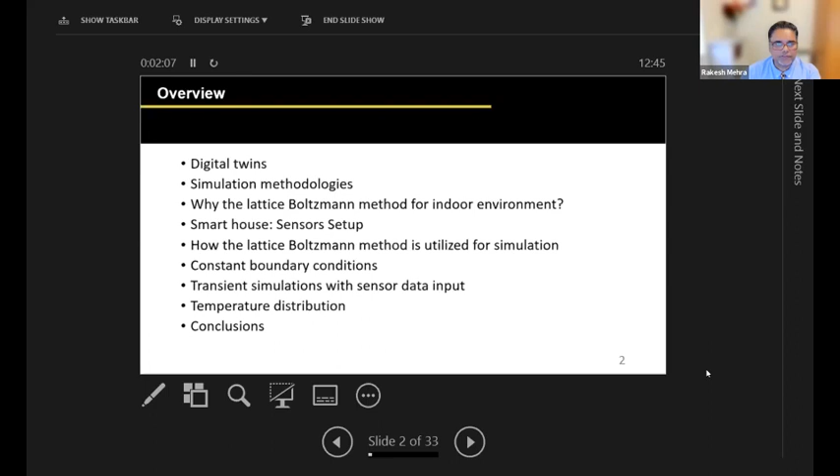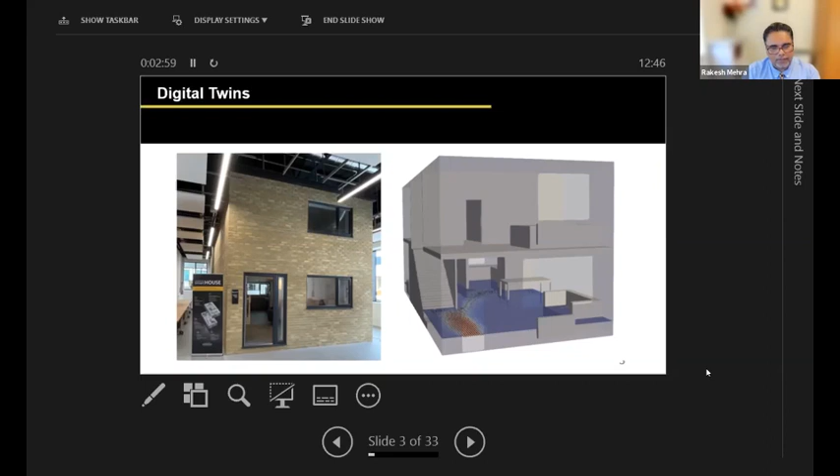But there are many technical aspects with regard to this in terms of twinning, what is the level of twinning and all that, and I'll come to that a bit later. For the moment, just for a basic description, we have a computer model and we have a physical model here.

Now, slightly more detail about how digital twins act. I showed you a physical model here and a digital model here. In this paper by Shahzad et al., they have very clearly outlined a physical asset and a digital twin of that asset. Basically, twins are twins to each other, but they are interacting with each other in real time.

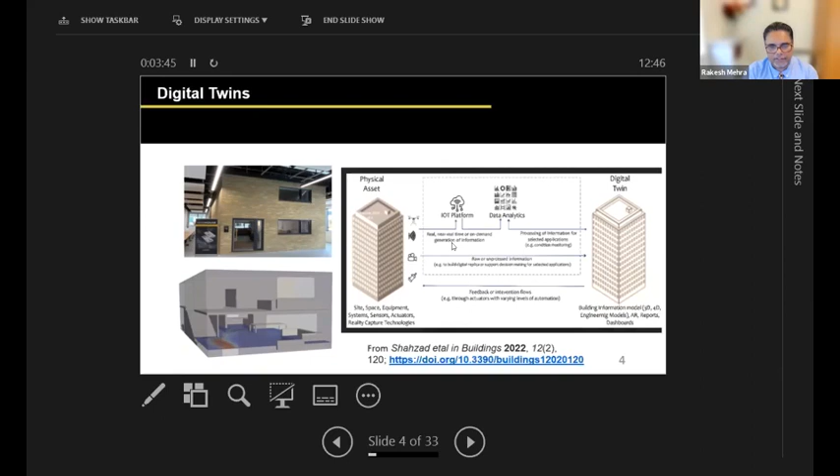For that interaction, we need an IoT platform. So we need a number of sensors put in the physical asset, and these sensors in real time must interact with the digital twin that we have on our computer screen. Both will have the capability of affecting each other's operation.

So let us come to something slightly more technical: what a digital twin is and how do we define it. There are lots of definitions, and because there are a plethora of activities currently in this particular area, digital twins mean different things to different people. If you go through the literature, there are lots of definitions.

I like this definition: it is an integrated multi-physics, multi-scale, possibly probabilistic simulation of a complex product that uses the best available models and sensors, and updates all the processes in the computer model, which indicate what is happening in the real twin.

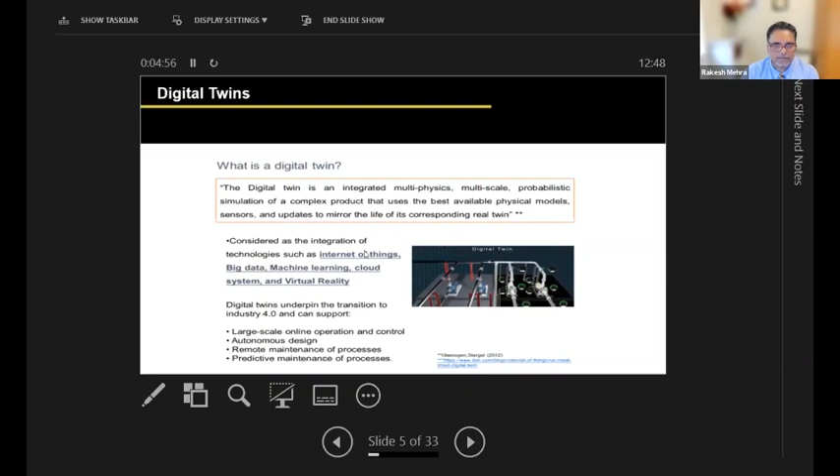So lots of things are needed, which includes many technologies: Internet of Things, big data, machine learning, cloud systems, and virtual reality. I'll go step by step through this with more detail on how these things are used and integrated, and then how they can be used for green, gray, and blue infrastructure, and how this adds to sustainability, which I will cover a bit later.

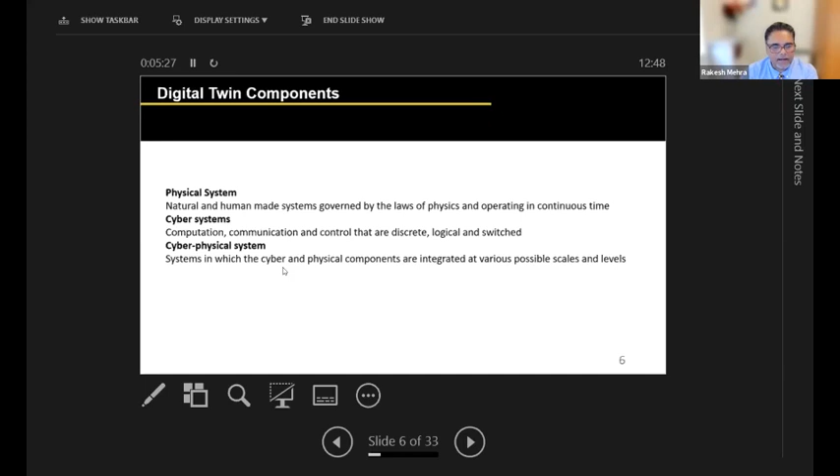So in a nutshell, a digital twin has three components. We have a physical system, as I showed earlier. We have a cyber system that works on a computer, and then we have a cyber-physical system that combines the physical system with the cyber system. The cyber-physical system is sort of a brain that acts between the physical system and the cyber system, and this is where lots of technologies come in.

So the key technologies that we need to have in the digital twin is, first, like we have been hearing, IoT for a long time. So we can connect a number of physical devices via the internet without human to machine interaction, almost in real time. So this is the first technology that is used in the creation of digital twin.

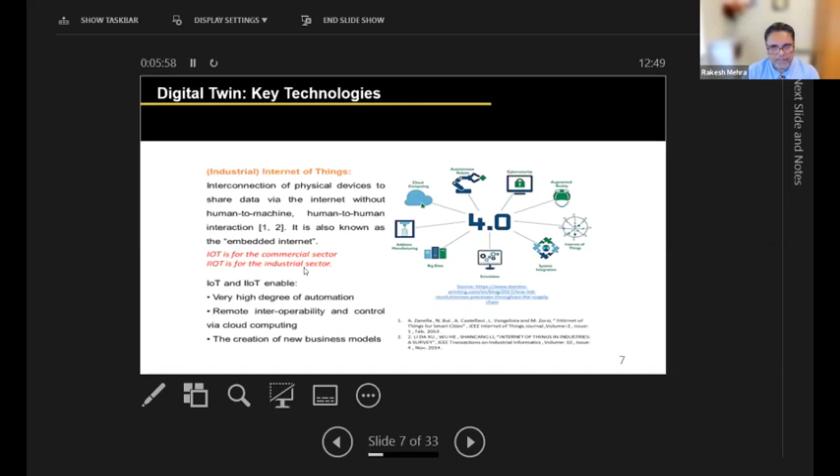So we can put wireless sensors, and they will give us data in real time for us to make inference from that. The second most important thing is cloud computing, because most of the data that is generated from the sensors can be stored in cloud, and then it can be used or manipulated by the user for getting their simulation models to get more information about their physical asset, and also to maintain connectivity between the physical model and the twin model.

Cyber physical system, as I mentioned, is the most important aspect of a digital twin, because it maintains the connectivity between the physical system and the computer or cyber system. So it involves lots of control systems which can affect operations in the physical system using a digital model. And any change that is happening in the physical system is monitored by sensors, and that gives information to the cyber system.

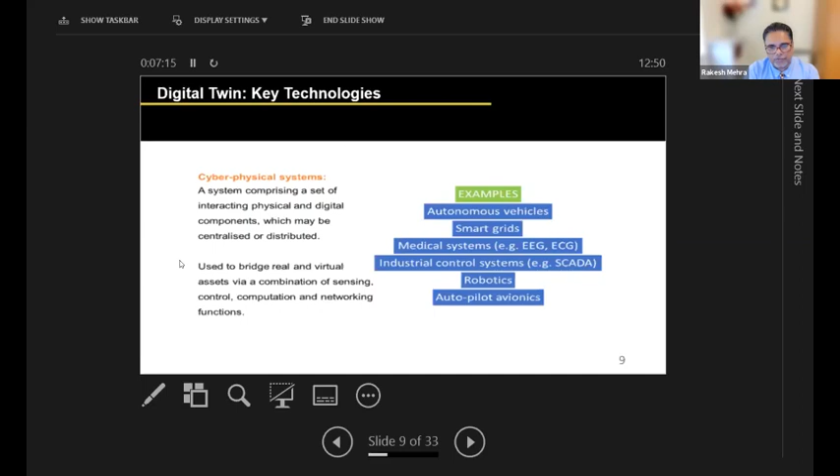So what has happened is, all the technologies are available, and now if you go through literature or funding opportunities or types of projects being awarded, you will notice that digital twins are being developed in almost all the areas, including health sector, infrastructure systems, natural systems, physical systems, and all that.

So as I mentioned, digital twins mean different things to different people. So here I would like to classify some distinction between what a digital twin is and what we wish to achieve. In classical engineering sciences, what we have is a physical system, and then we have our simulation. Using any computer model, we create that physical system on the computer, and we try to assess how this physical system is performing.

But this is done offline. For example, if we want to model an indoor environment, we create a model of the indoor environment, we put some boundary conditions that we expect the physical system to act with, and then we try to see how the physical system is going to behave. So that is typically offline simulation.

The next stage, more intensive, is online simulation, where we have the physical system with sensors in it. These sensors are giving us data in real time, and that data is used as boundary condition for simulation, which are equally fast and give us information about how our physical system is behaving almost in real time, at very, very local level as well.

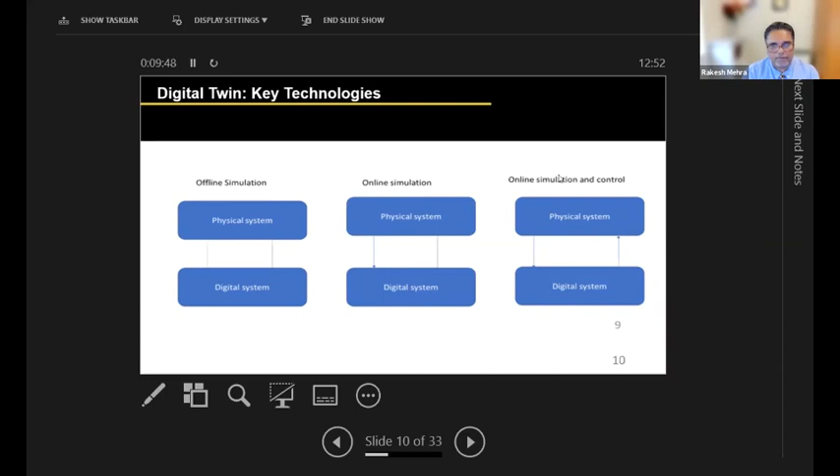The digital twin allows us online simulation and control. So in this case, what happens is we have a physical system with sensors. These sensors are providing data for a digital system where we can carry out very fast simulations. But at the same time, we have the capability of controlling how the physical system behaves from our digital system. So this is our aim of creating a digital twin.

Okay, so ultimately why it is needed - I can list many pages on this, but just from our point of view, some useful information: local versus global flow field. From measurements, putting some sensors here and there, you can find some information on how different things are happening, how different processes are taking place. But a digital twin allows us to monitor the entire space simultaneously, giving us local information almost simultaneously.

The second thing is tracking of pollutants. For example, if there is a pollutant in an indoor environment or any environment, we can see how the pollutant will evolve, and then how we can develop mitigating strategies for that, almost in real time.

So evolution of any process, we can track with digital twin, and we can take any corrective measures. We can control the environment through proper actuation mechanisms or through systems developed for controlling the environment.

We can design control systems. We can improve energy efficiency of our heating and cooling system because we'll know locally how the comfort conditions will be across the space, so we know what energy is needed for that.

We can monitor performance of systems - performance of indoor environment, performance of the entire physical system, we can carry out using digital twin. The most important aspect is we can real-time monitor how things are at different points in the place.

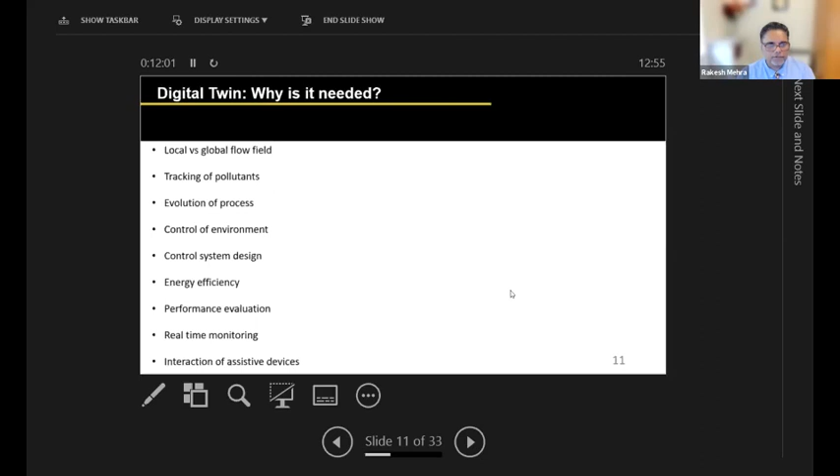As I mentioned earlier, we need a physical system, we need sensors, but we also need simulation methodologies. One of the simulation methodologies I have chosen is known as the Lattice Boltzmann method for an indoor environment. There's a reason behind it, although there are many simulation methodologies and one can choose any, but I've chosen Lattice Boltzmann for this particular case.

We also have expertise in other methods which are more useful at the microscopic scale. Just to give you an indication, I don't want to go into much technical depth of the method, but just to give an overview of how this method works and then how we can use it for digital twin, you can see this picture on microscopic scale.

If we take about 1 centimeter by 1 centimeter by 1 centimeter volume, in that volume there'll be approximately 10 to the power 23 particles, atoms, molecules. Now using Newton's second law of motion, force equals mass times acceleration, if I want to find how different particles are moving, I have to solve 10 to the power 23 equations. We need very fast computers with huge memory to see how different processes are evolving.

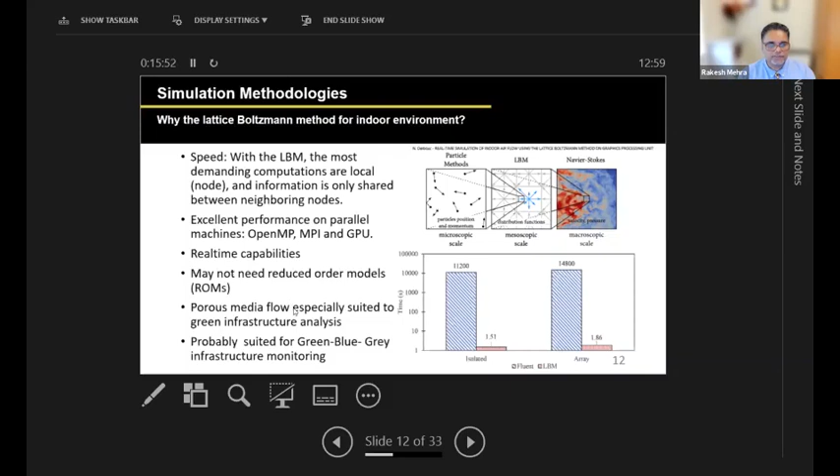Apologies, Rakesh - can we sum it up in less than 5 minutes? Yeah, that's what my plan is.

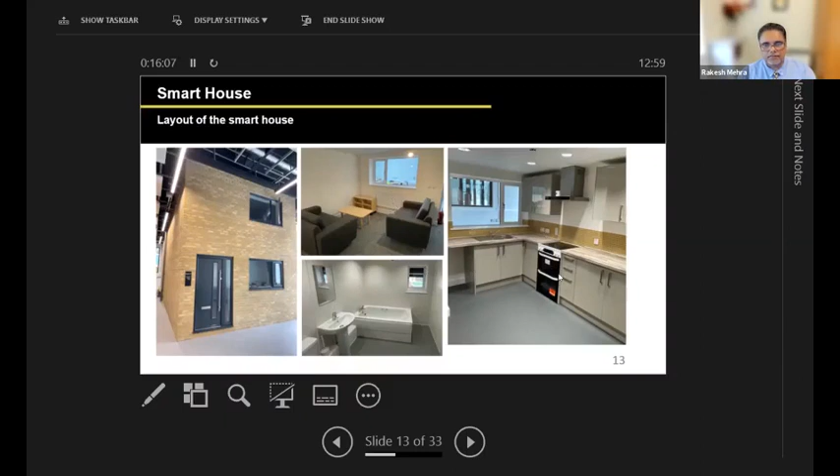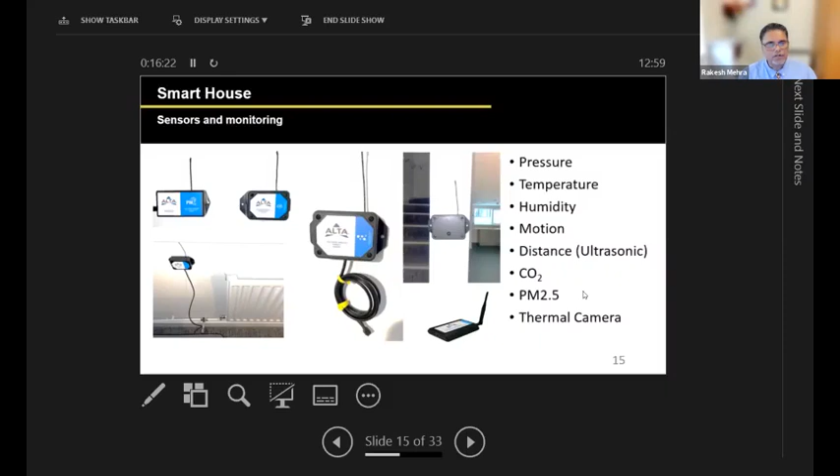Okay, so this is the example of the smart house. You can see how it looks: washroom, living room, and the kitchen. We have placed sensors everywhere in the smart house, including pressure, temperature, humidity, motion, distance, carbon dioxide, and PM 2.5 sensors. We also have thermal cameras, so we can monitor lots of activities within the smart house.

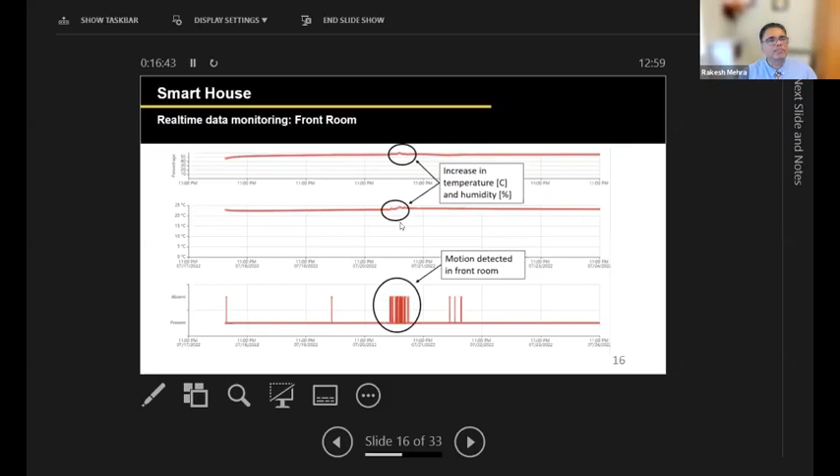This is the type of real-time signature that we get from the smart house. You can see when there is motion, the motion detector observes someone coming in, and this shows a signature on temperature and humidity, as well as an increase in CO2 concentration. So in real time we can monitor how things are happening and how occupant behavior is affecting the indoor environment.

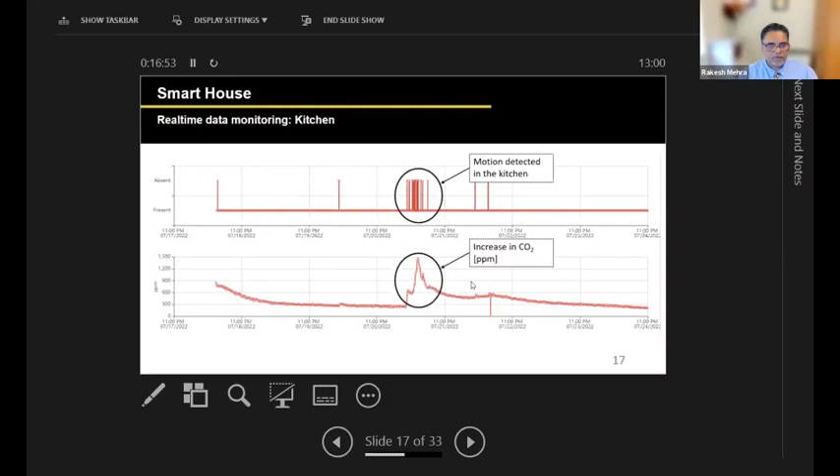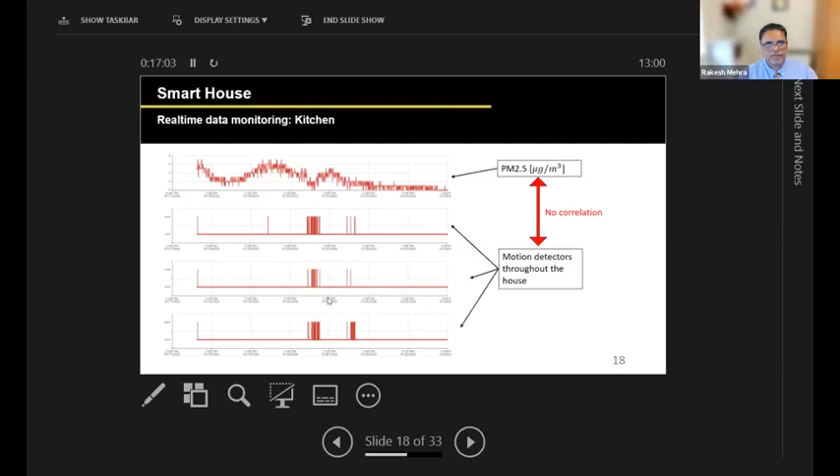We could also see that this PM 2.5, although we mentioned, did not correlate very well with the arrival and departure of people. So this is some of the information that we got.

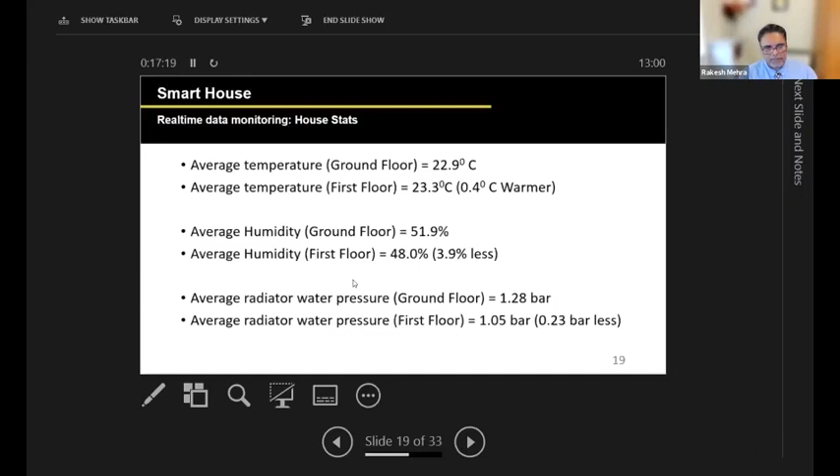We can average out and get overall information about the smart house pressure, temperature, and we can even monitor the central heating system performance, because that is also properly instrumented.

This is an example of a sensor map. On the left you have the ground floor, and on the right you have the top floor, and you can see the number of sensors we have put in there, of different types.

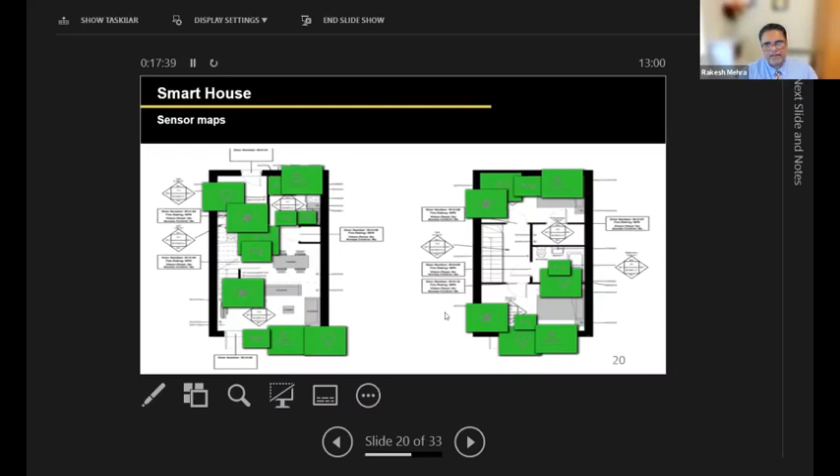So this is the sensor part, and then we have integrated this with the simulation methodology, which is based on the LBM method.

This is basically started with cellular automata, which says that the state of a particular cell in the future will be dictated by its neighboring cells. There can be 256 rules for one-dimensional cellular automata. I'll show you a video here just to demonstrate how using cellular automata we can predict the future states of the cell.

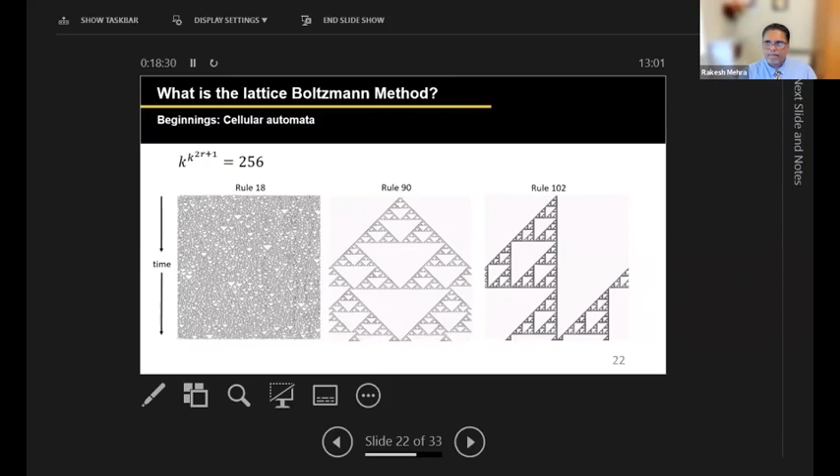So this was the basic... okay.

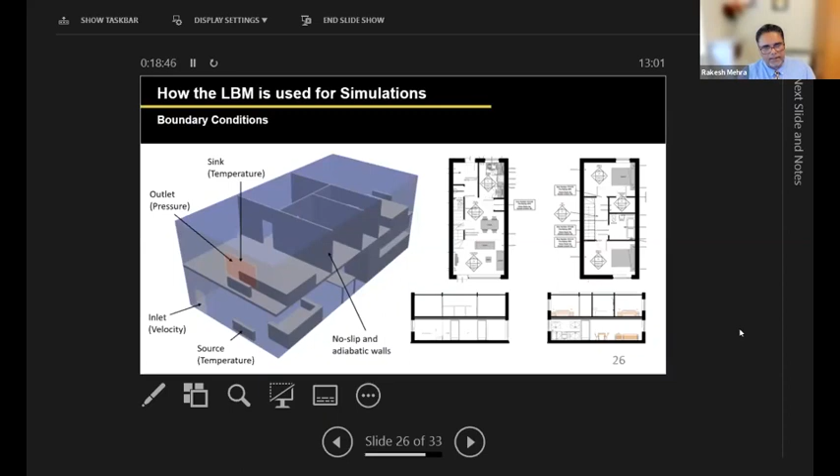So this is the smart house. We have shown you the sensors, we have shown you the building, and then we have carried out simulation from the data that we got from the sensors.

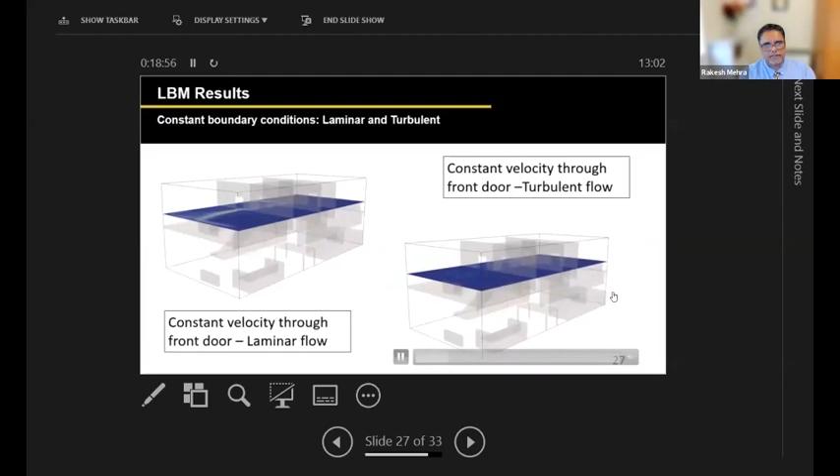As you can see here, this is the local velocity field inside the smart house, both for laminar flow and turbulent flow, which we have managed to get through the Lattice Boltzmann model.

This is just to demonstrate to you the effect of people coming through the front door on the velocity field inside the smart house.

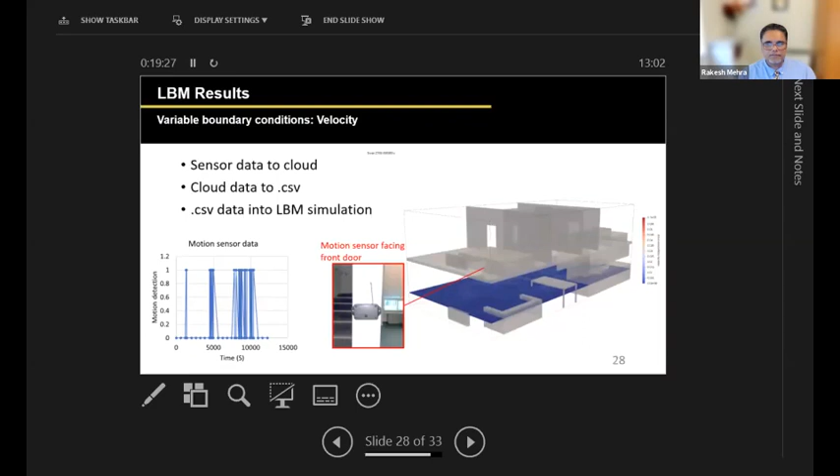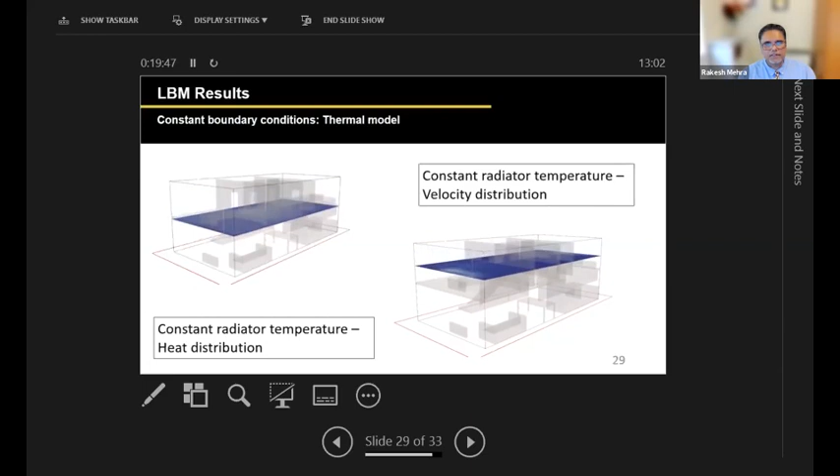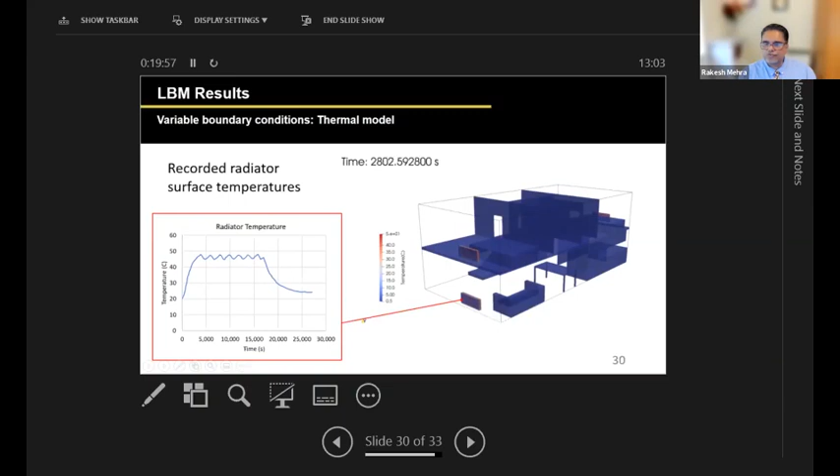And this is the real-time data from a radiator that is being used. You can see the color of the radiator changing, and you can also see in real time how the thermal plume is being generated and how buoyancy-driven convection can be monitored almost in real time from the data obtained.

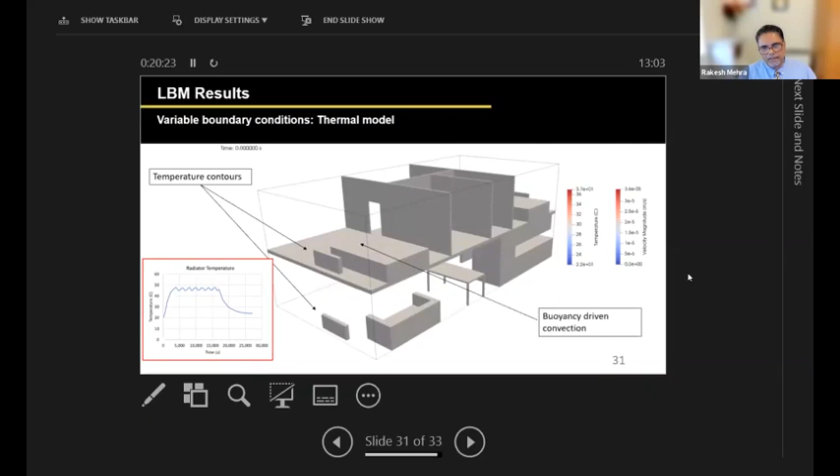So this is just to demonstrate that we have been able to model and integrate sensors with real-time simulation. It is still in the process of development for refining, but at the basic level we have managed it, and through this we can almost in real time monitor any processes taking place in the smart house.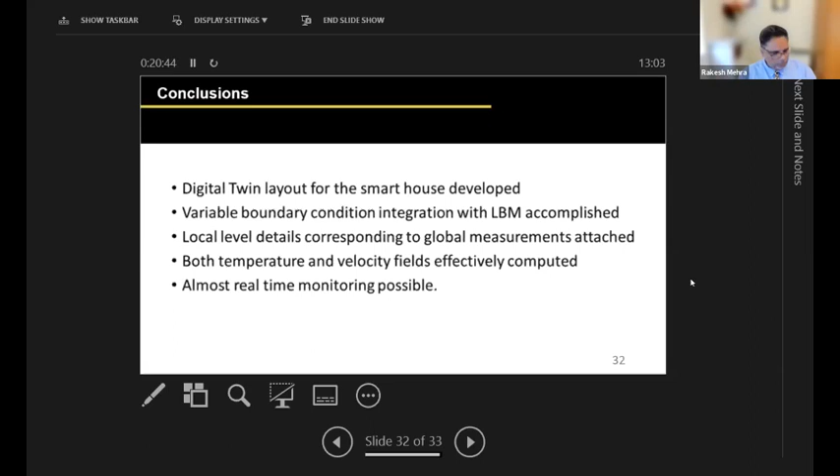We wish to take it further, and I would welcome any collaboration opportunity. If you want to visit a smart house, please feel free to contact me at r.mishra@hud.ac.uk. Many thanks for listening, and I'll be very happy to answer any questions at the end.

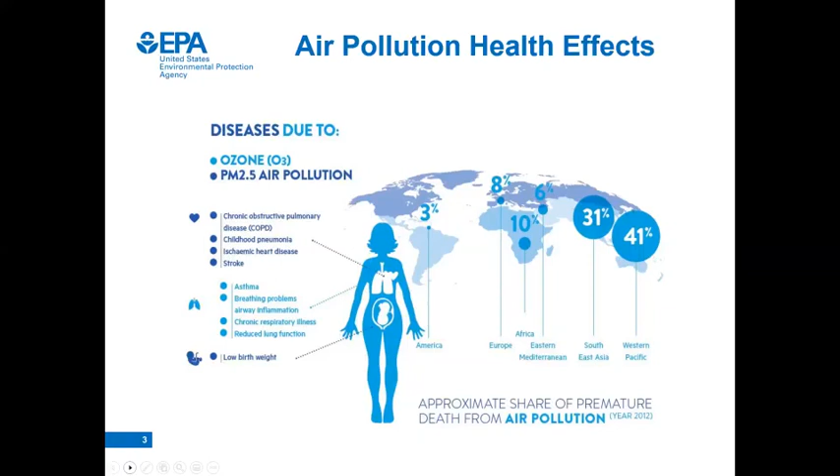In addition to air pollution in general, exposure to traffic emissions has been linked with an even increased risk of adverse health outcomes compared to air pollution exposure in general. We're really concerned about people who live, work, go to school near large highways, but also other transportation facilities like rail yards, ports—anywhere people are exposed to fresh, direct emissions. Again we see health endpoints from respiratory to cardiovascular, but also birth, developmental, and cognitive effects. We're especially concerned with children.

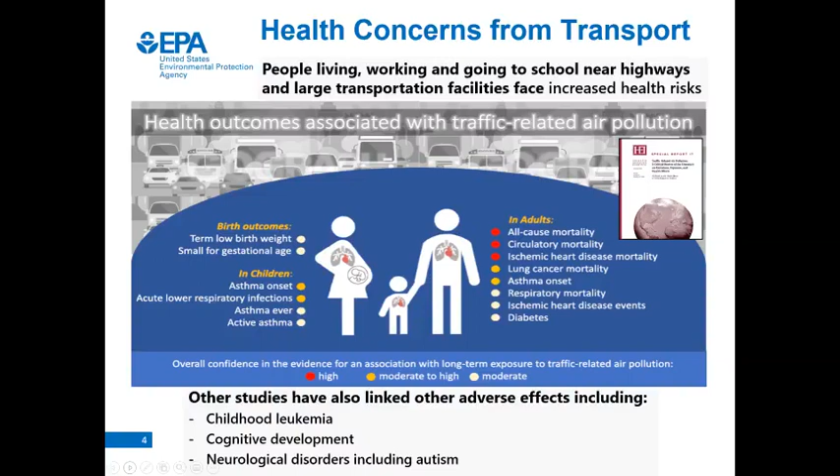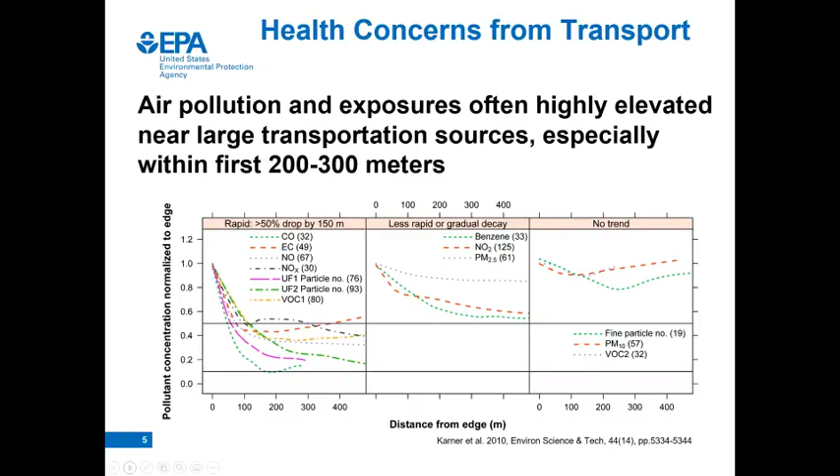One of the reasons we've been especially interested in transport sources is that air pollution can be highly elevated very close to roads. Even with high background concentrations in urban areas, we can still see elevated concentrations within the first 200 to 300 meters of large roadways, sometimes an order of magnitude higher for certain pollutants that are especially associated with fresh vehicle emissions.

I did also want to mention how we can get these climate benefits. Again, green infrastructure is very commonly known for CO2 sequestration, but we also have this concern over short-lived climate pollutants, especially black carbon and methane. I'll talk a little bit about that too, because for us to reach our global climate goals, mitigating these two pollutants will be extremely important, especially in the short term.

When we look at mitigating transport emissions, historically we're talking about reducing just vehicle direct emissions. That's the traditional mission of many environmental agencies, including my own here in the United States. But we also look at other methods - we want to reduce vehicle use and activity. We started a lot of this research because we wanted to also investigate how urban design and transportation planning can reduce people's exposures, especially to ubiquitous sources like transportation.

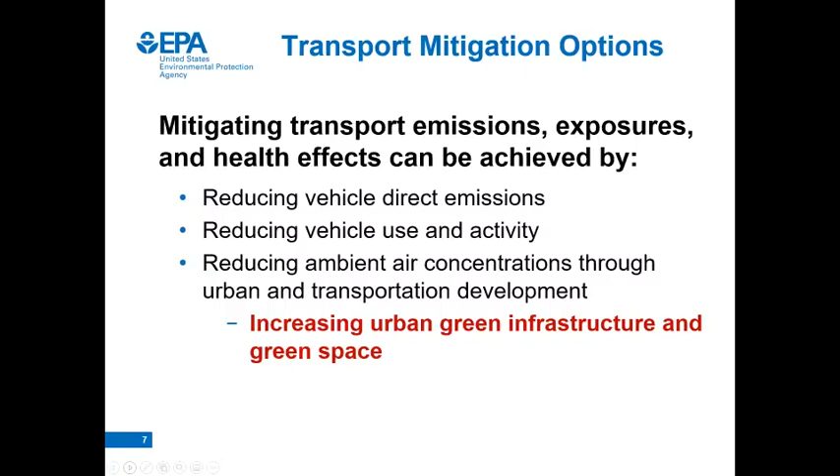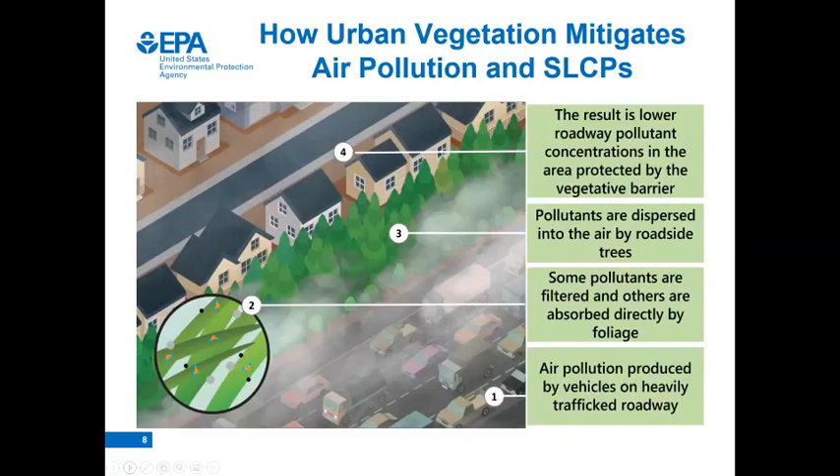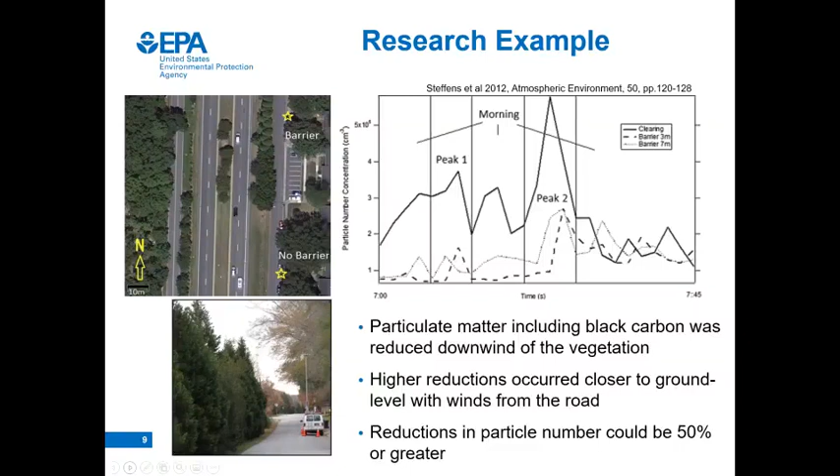For the sake of time, I won't get into a lot of detail on the research, but I wanted to focus more on the recommendations and summary. I did want to let listeners know this is grounded in research, not just in the United States but worldwide, including a lot of work done in Europe. This is just an example where we can see particulate matter, especially the really small ultrafine particles - when we look at particle number or black carbon, we can see very significant reductions, even as much as 50%.

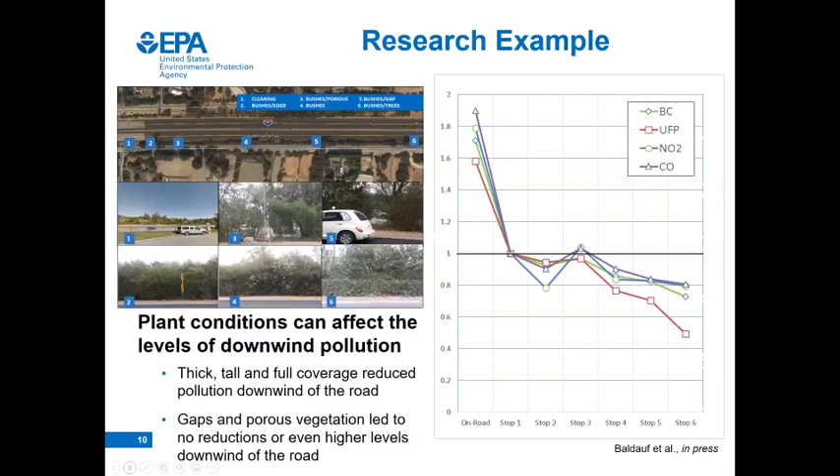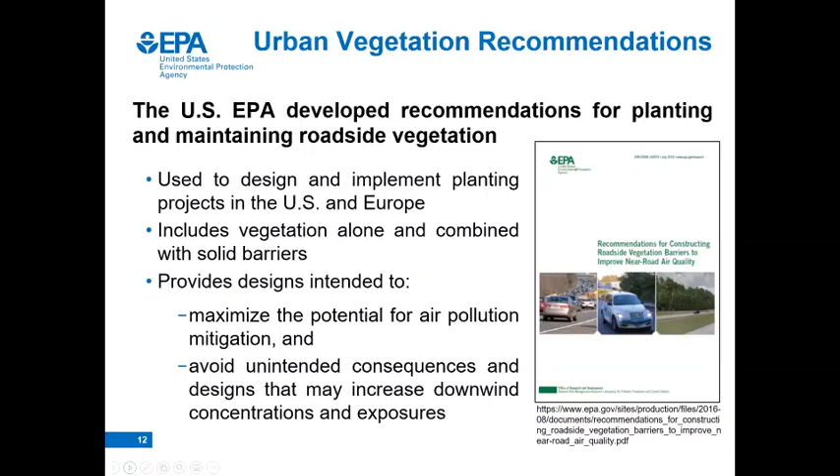In addition to publishing in scientific journals, at EPA we've put together a recommendations document to highlight what characteristics are important. These recommendations were actually used for some design projects, and we developed them for implementing projects both in the US, and it was also used in a couple of European projects. Really, what we were trying to focus on is giving the information needed so designers could maximize potential pollutant reductions, and also avoid those unintended consequences like I showed in the previous slide.

This is just a real quick summary and some examples of potentially effective roadside vegetation barriers. As mentioned, we really need thick, as tall as possible vegetation, but usually we're talking at least about 3 to 4 meters in height. Coverage from the ground to the top of the canopy is important, with no gaps, no dead trees, and maintenance is very important in this case.

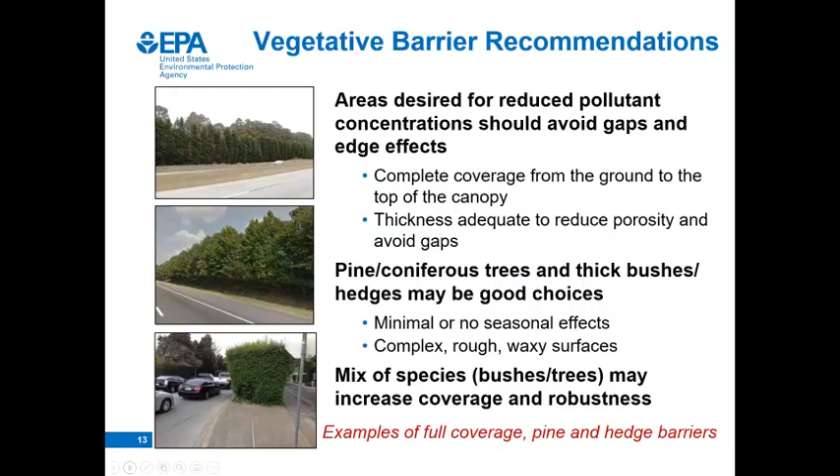Hedges are very popular in the UK and other parts of Europe, not quite as popular in the US, but it's actually growing. This bottom example is actually from California. We've seen a lot of research showing how hedges, if they're thick and very healthy, can be an effective roadside barrier.

In addition to what's effective, we really want to highlight types of vegetation and design characteristics to avoid in our guide. We especially like to highlight the top left picture because often when we talk about planting roadside trees, people think of this type of ornamental tree with a nice big canopy, very aesthetically and visually pleasing. However, this is not effective and can actually worsen downwind air pollution because the pollution plume from vehicles can go underneath the canopy. The air will follow that path of least resistance, so we can get a concentrating effect underneath, and the canopy can slow winds and cause a stagnation effect.

The bottom middle picture shows the importance of maintenance when developing a vegetation barrier, because if you have gaps, like dead trees, or seasonal effects, we need plants that maintain their integrity year round for effective barriers. If we have these kinds of gaps, pollutant can funnel through, wind speeds are reduced, and we can see increased concentrations. This is actually from one of the research studies I mentioned.

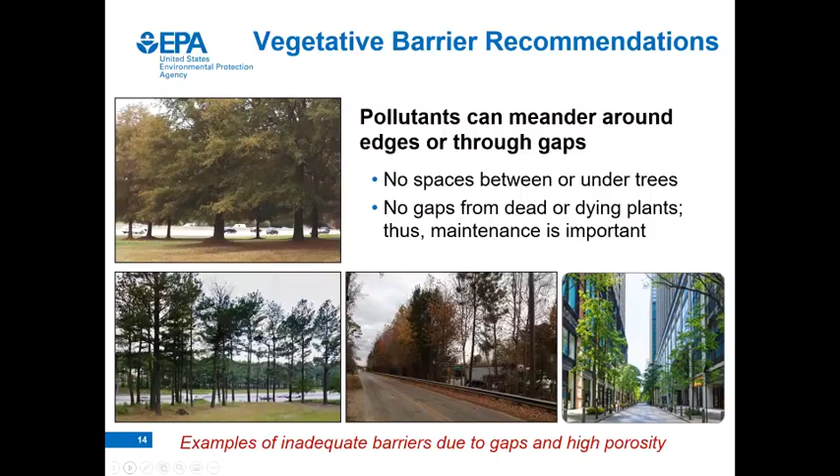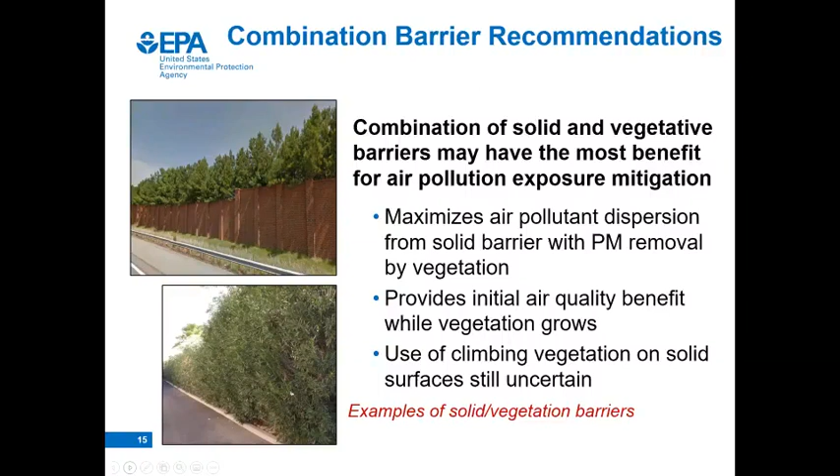The last recommendation I wanted to mention is that research has really shown if we can combine solid structures like fences or solid noise walls with vegetation, we can maximize pollutant reductions. The solid structure ensures that we get that dilution effect off the roadway, especially for people at breathing level height, but then we get the added benefit of filtration from the vegetation. A lot of research has shown that this really maximizes downwind pollutant concentration removal.

I wanted to show a couple conceptual approaches and applications. We have situations like shown in the top left, especially large roadways with open areas, and exposures, as I showed earlier, can be very high - for some pollutants, an order of magnitude higher a short distance from the road. This gives us a lot of opportunities for planting and increasing green infrastructure for air quality and other benefits.

There's an example of several types of planting applications that could be done in that kind of situation. In a lot of cases we do have walls and structures for sound mitigation, but we can also use those as planting opportunities to get an even further increase in air pollution reduction.

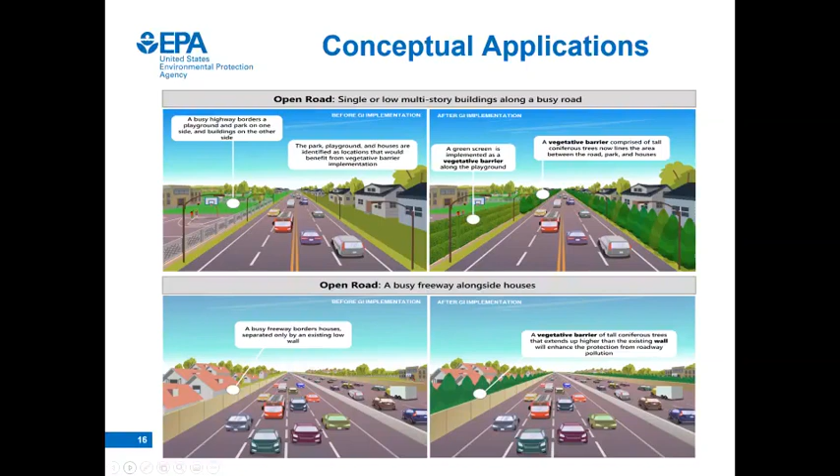When we're talking about urban canyons, they're much more common in Europe, but also very common in many of our megacities throughout the world. It's a more complex situation, a little more difficult to deal with, but research has shown that low walls, low hedges, or even combinations of the two can improve air quality at the street level. We can also talk about other benefits in greening these situations by adding green walls, green roofs, and other types of green infrastructure to increase some of the other benefits as well.

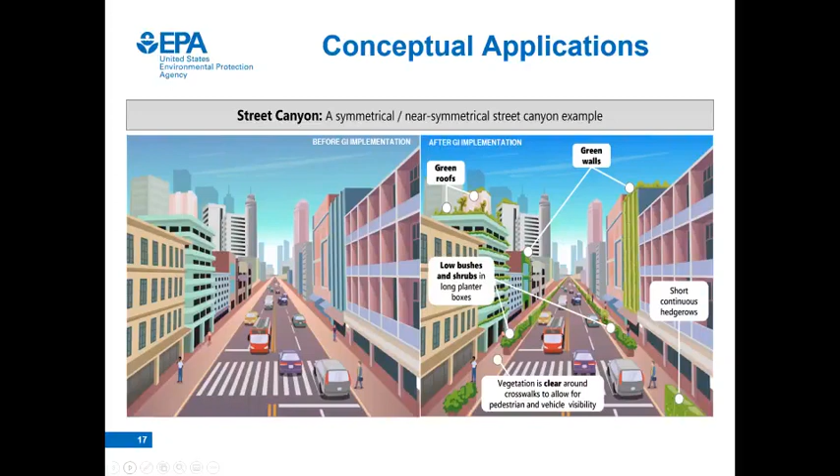Again, just included in our recommendations, there are many other considerations. Vegetation characteristics and species are important—native versus non-native, how robust and healthy they'll be from planting, especially in the near-road environment, which can be very rough with treatment and other chemicals from vehicles, so they have to be robust trees. Then also for the region, is it dry? Is it prone to flooding? Other kinds of situations like that are very important.

And then, as I mentioned, the physical characteristics. In addition to what I've already talked about, things like the leaf surface itself, either waxy or hairy, can improve especially the retention of PM removal, where it stays on that leaf surface and doesn't get re-entrained during high wind events. Also very important, we don't want vegetation that can actually emit pollution like VOCs, pollen, or other allergens, and we get into that in our recommendations as well.

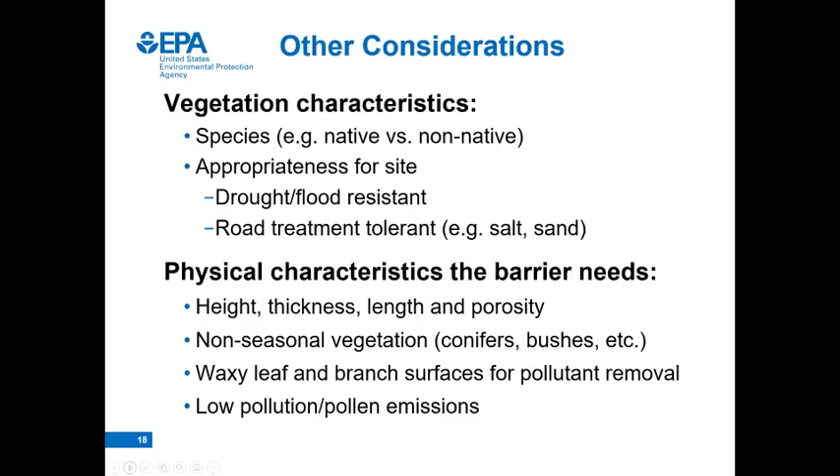Can you go to the next slide? I'll be finishing up here in a couple minutes.

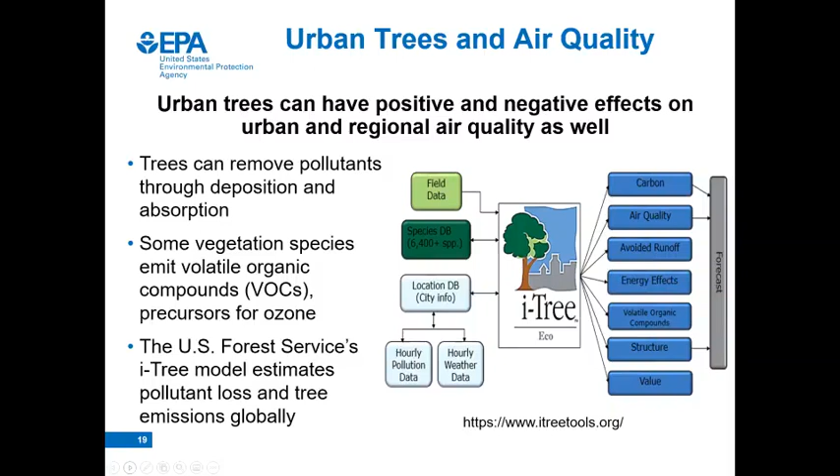I did want to point out when it comes to selecting species, there are a number of programs worldwide. Many countries have programs or tools that can help with species selection. This is highlighting one from the US, our Forest Service, called i-Tree. This model is global, so it provides information on tree species throughout the world, and several countries that don't have their own databases often use this model as well. It can help with species that don't have seasonal effects, that are more native or robust for a certain region, but also don't emit high levels of pollutants or other sources of concern.

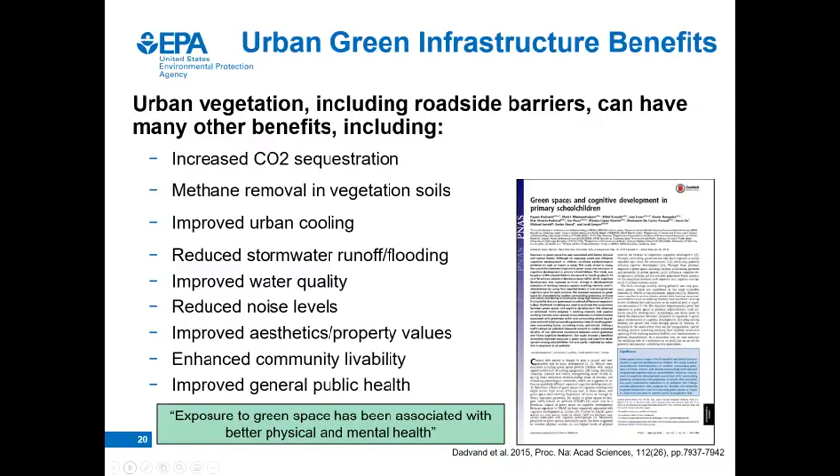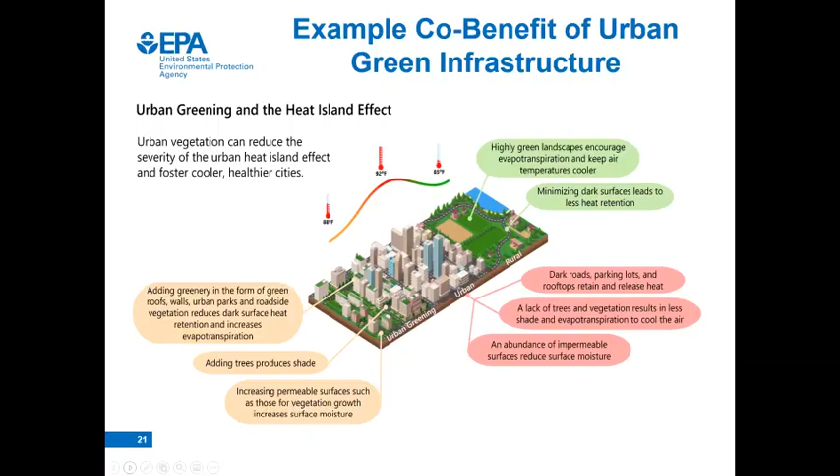We can go to the next slide. I'll highlight real quickly, this is showing some of the co-benefits. I think many people are aware of the potential urban cooling effects from increasing and maximizing green infrastructure in urban areas. We can go to the next slide.

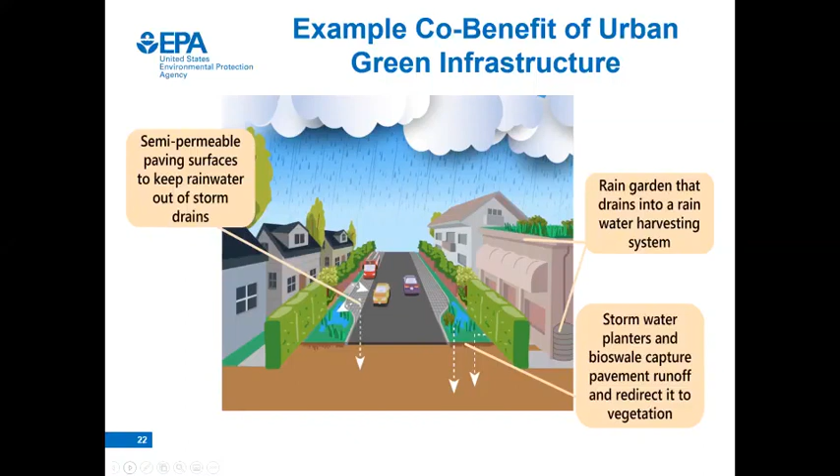And lastly, as I mentioned, traditionally stormwater management has often even been the term used for green infrastructure, at least here in the United States. So we really want to highlight how in many cases we can also integrate an air pollution benefit into a planned stormwater project, getting multiple benefits and not losing any opportunities for air pollution improvement. With that, we can go to the next slide—just my concluding remarks, but for time, I'll transition now to the question and answer.

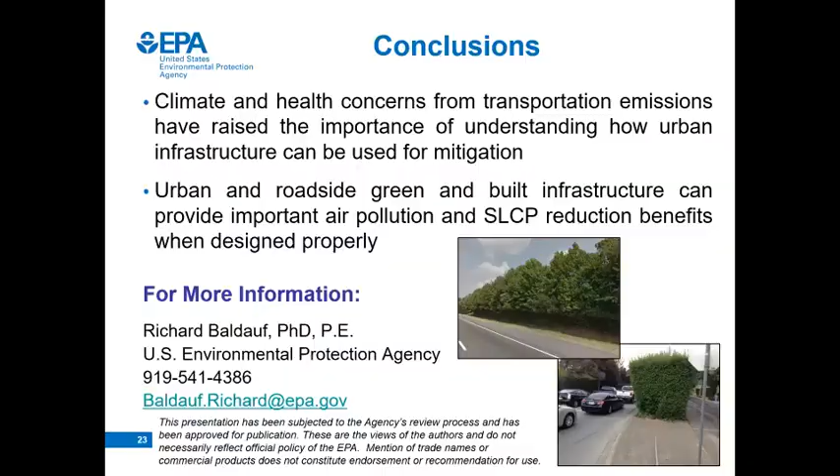Thank you, Prashant, and thank you to both speakers. If you have any questions for the speakers, you can type them in. We don't have all that much time, but we had a question from the Q&A from Emma Ferranti asking Rakesh: what are the links between the fundamental research you're doing on your digital twins and the blue and green infrastructure? Where do you see that link?

Thank you, it's a very good question. The work we have done up until now is creating digital twins for basically various physical systems, mechanical systems, and now we have extended it to monitoring of indoor environments.

So the main use of digital twins is monitoring performance of different systems. I provided the framework: you have a sensor which can sense various process parameters, and then a machine learning, simulation, or other model that can use that data to predict and monitor different variables corresponding to green, blue, and other infrastructure for better performance. The framework is there, and now it's for us to think about how to apply it. Currently we're using it mostly for pollution control or monitoring and developing mitigation strategies, and the same thing can be carried out for green and blue infrastructure.